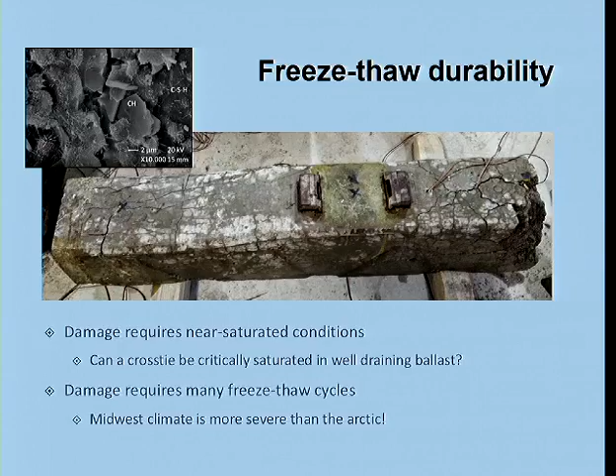We know that concrete is intended to be freeze-thaw durable, and we have a main tool to do that called air entrainment, where we intentionally infuse billions of small little tiny bubbles that reside in the microstructure. Here's a picture of typical air bubbles from air entrainment.

The concept is that we want the water that exists in the very, very fine capillary pores of the concrete material to have a bleed channel, a relief channel, moving toward this air void. So this channel, this boundary, is a boundary with an air void.

The bubble is huge, way beyond the size of the screen. So if there's water inside these capillary pores that wants to turn to ice, that pressure can be relieved if there's a path outward. By having these little air bubbles present in the microstructure, we essentially give that kind of pressure relief.

That's the basic idea. Of course, the people involved in manufacturing concrete ties know this, and they input air into the concrete. So presumably this would be taken care of, we would hope.

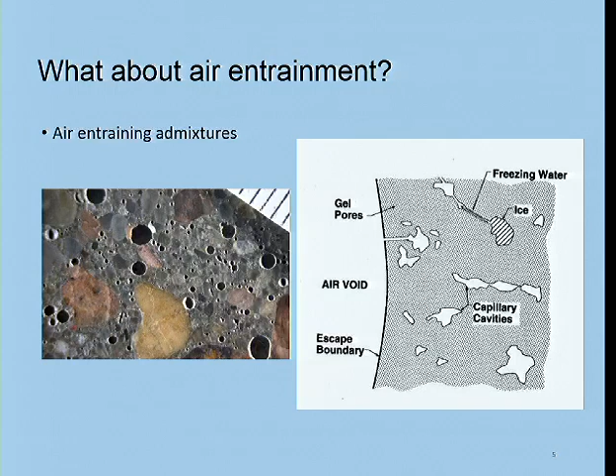But what drove this project in the first place is concern about field performance of concrete ties, and a broad experience through the industry that when we expose our products to ASTM C666 freeze-thaw testing, we do not pass it routinely. We continue to have challenges passing these thresholds for freeze-thaw performance. Why is this? So that was what motivated the project.

Here's a diagram, a picture of microstructure, to give you some background on how we measure these things. This particular picture shows how we use a flatbed scanner and dye the paste surface with a pink dye - the orange bubbles are illuminated - so we get a scan of microstructure that gives us three phases: the aggregate, the gray in between which is the paste, and the white which is the air bubble.

We did thousands of these images to characterize many, many different samples. I never knew concrete could be so pretty. Oh, it's beautiful.

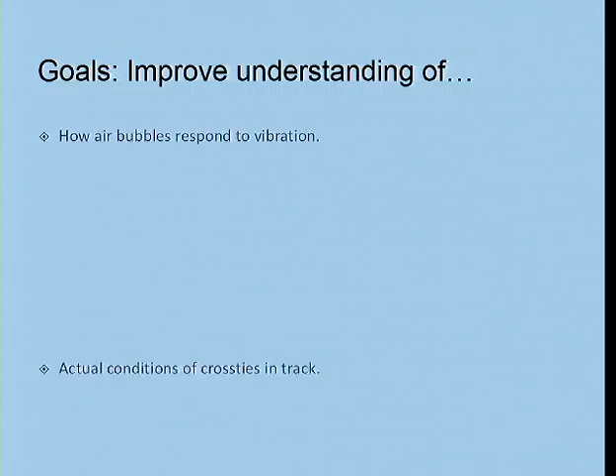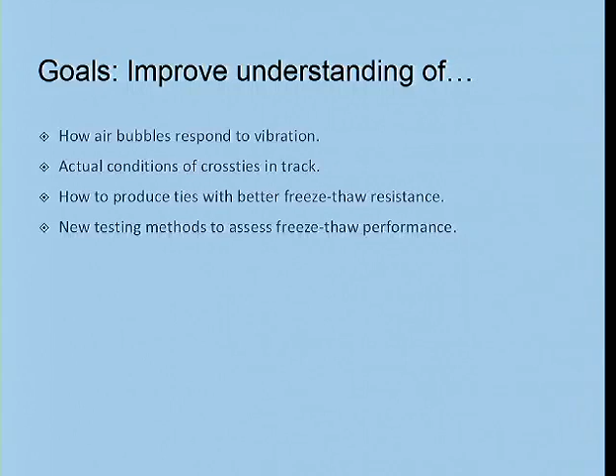Our goals in this project were to improve understanding of, first, how air bubbles respond to vibration during the manufacturing process; what are the actual conditions of cross ties in the track; how we should produce ties with better freeze-thaw resistance; and last, how new testing methods might assess freeze-thaw performance. These are the global driving forces behind the project.

We happen to have completed this project. We did our final presentation to the FRA in January, and I wanted to mention how this was organized, because it gives you a chance to quickly see how there was a significant contribution to theory, talking about bubble mechanics and vibration and so forth.

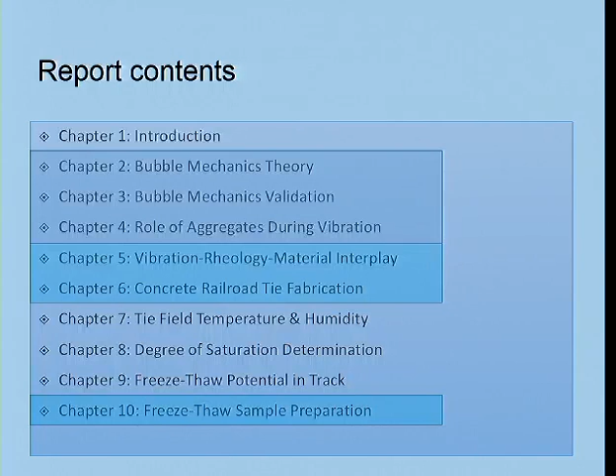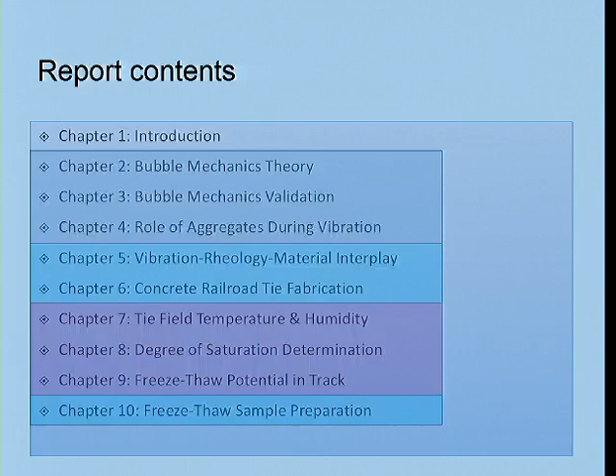Then there was a section on the interaction with the manufacturing process. We spent three trips going to manufacturing plants - the team did - and two of those trips were a month long, so they were getting lots and lots of data. And then the last is a big initiative having to do with measuring things in the field. So it's quite comprehensive in that regard.

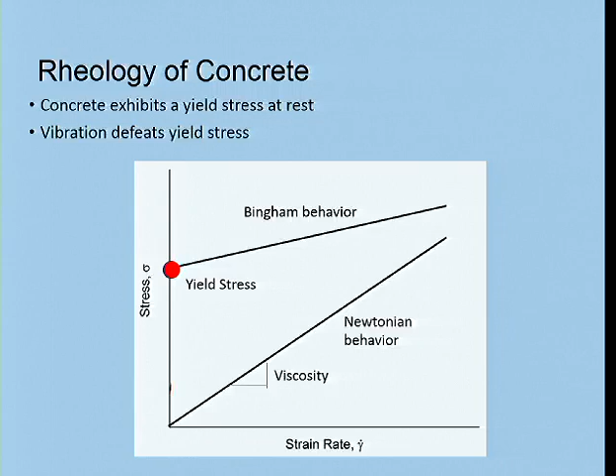However, that's not really where we're having our problem. These measurements are made at basically static conditions, very slow yield, we're not moving the fluid at all. When we are vibrating the material, the behavior is different. So we can do these rheological tests under vibration, and we get a different story. We get near where we expect to have yield stress, that yield stress is defeated, and we actually have what is essentially like a Newtonian fluid when we're under vibration.

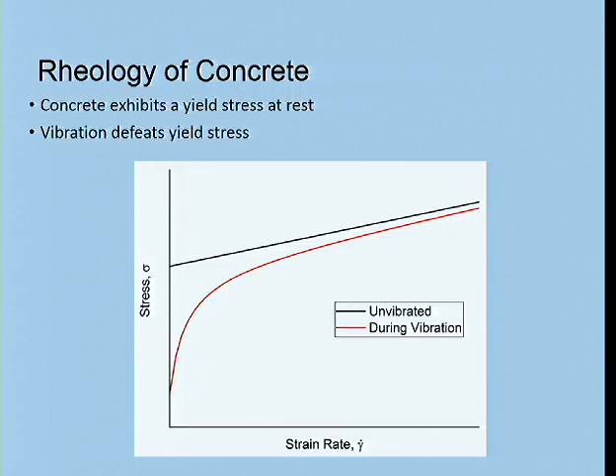Why is this important? Because vibration is how we consolidate the material, and it's the period of time we're concerned with today, when air bubbles are moving and rising through the material.

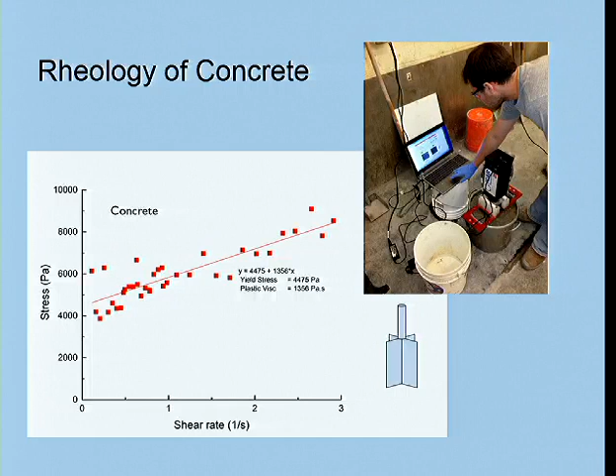Here's a picture of how we measure rheology of concrete, and this is some data showing this kind of Bingham behavior. We have little tools in the lab that allow us to measure rheological properties on bulk concrete samples. The theory for bubble rise goes something like this: if we have a hollow bubble, there's a buoyancy factor, counteracted by Stokes' drag force.

The equations from this analysis of buoyant force versus Stokes' drag force show that small bubbles, resisted by the viscosity of the fluid, are the slowest in their movement. So the velocity of the bubbles U is highest when the diameter of the bubbles is high.

So we get a picture here that under vibration, the first thing that's going to leave the system are the largest voids. They will tend to escape quite quickly. The very finest voids have some stability by nature of the viscosity of the system.

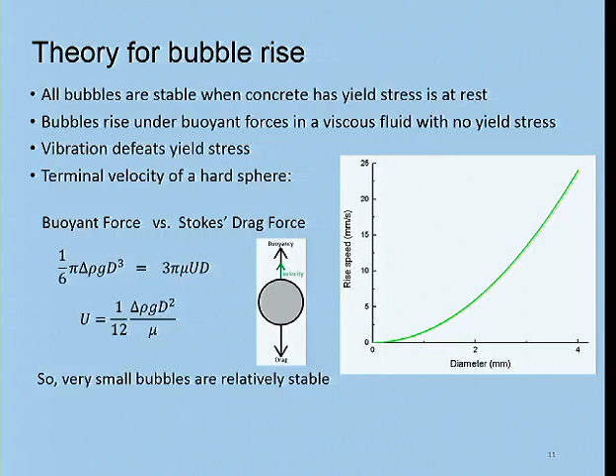We wanted to see how this worked, so we did experiments of concrete under vibration with air entrainment, putting an air meter with a concrete sample on a vibration table. We did these tests with concrete and could see air decreasing with time. Vibration time is on the x-axis, air content on the y, and you see this drop with time of vibration for concrete.

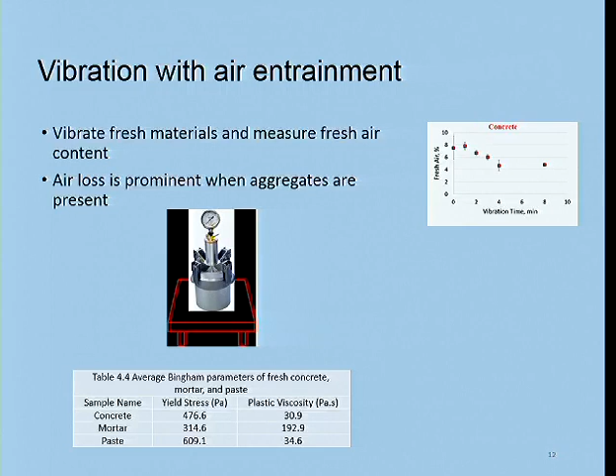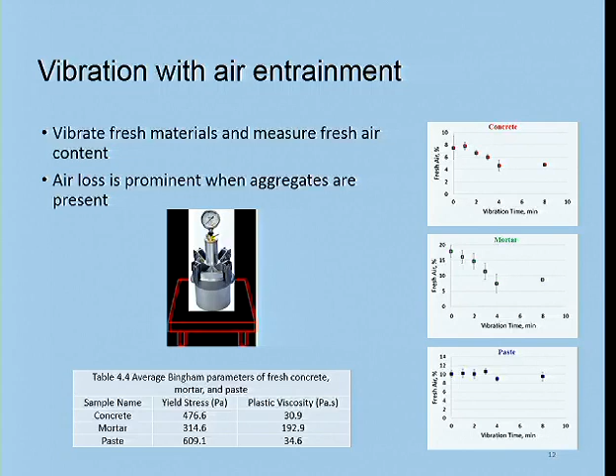If you did it with mortar, just the paste and the fine aggregate sand, we see the same kind of drop. But if you do a test on just paste alone, air-entrained, you see almost no loss of air when it's vibrated. That's interesting, isn't it? Something about the presence of aggregate in concrete and mortar, versus the lack of aggregate in paste, makes a big difference. That leads us to think about the granularity of these materials.

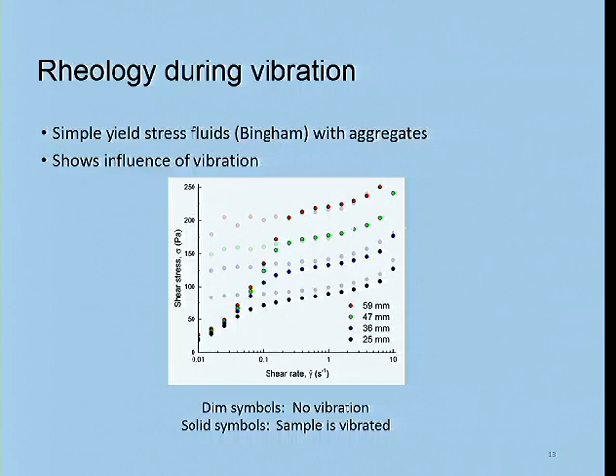So this is another picture where we did tests doing a sweep of viscosity or behavior with a rheometer, with different size aggregates. The light dim symbols are when we don't have vibration, and when we turn on vibration, our sweep shows this very different kind of drop in yield stress at the slow strain rates. So we know that the aggregates have a pretty important part to play in this problem.

It brings in some ideas about modeling the fluid as a granular fluid, and we have some tools available from literature. None of these things had ever really been applied to concrete materials before. These models, especially in the context of air, looking at air and vibration, we were bringing these kinds of things in for the first time.

So it was very interesting to see if this would help us explain the behaviors we were seeing. We used models like the Roscoe's equation, which gives us the ability to put in volumetric presence of sand and aggregate, and we can use the same model for coarse aggregate in concrete. It gives us the right kind of constitutive performance we were looking for, which encouraged us to explore how the granularity of concrete was a big part of the behavior we were observing.

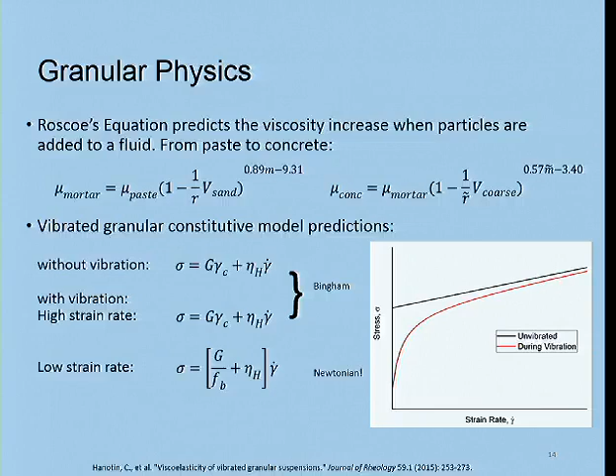The other thing you see is that not all these balls were treated the same. This vibration rod is moving back and forth, but the ones close were more dramatically affected. This led us to coin the phrase 'cone of action.'

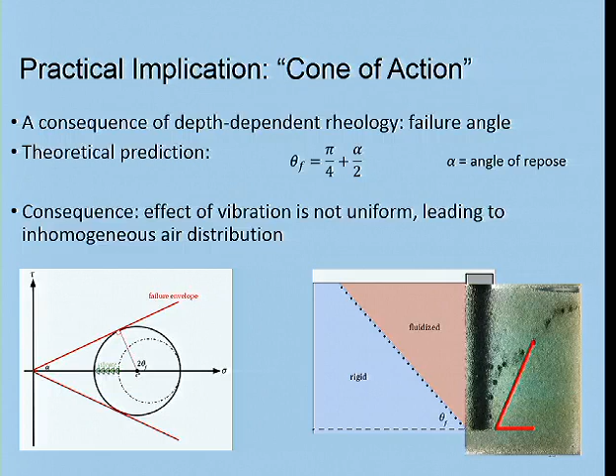If you're a concrete technology person, you'd recognize the term 'radius of action' - you put a vibration probe into concrete and see a radius of action that gets fluidized. We recognized pretty soon that this was a misnomer of sorts. We were seeing it as a radius of action only because we were looking at the surface. If we could look all the way down, we'd recognize it was not a radius or cylinder of action, but in fact more of a cone of action, and it changes significantly how we think about consolidation and the propagation of vibration through these systems.

This also led us to be able to model these systems, so now we can have models comparing no vibration versus 2 minutes of vibration. We start with a certain distribution of air bubbles, apply vibration, and get another distribution of air bubbles.

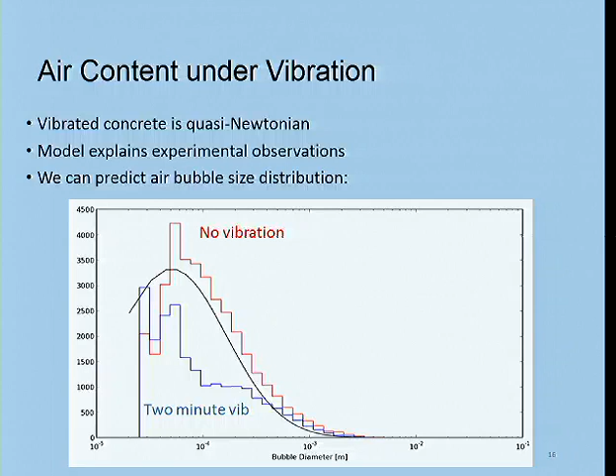With these kinds of tools, you could design the properties you need in the concrete and the intended distribution of air bubbles to give yourself freeze-thaw protection.

We were able to run simulations showing small air bubbles starting from large air bubbles. After 300 seconds, here's another picture of the microstructure, and after double that length of time, even more reduction of the size that you see here.

This chart tells us how viscosity plays a role here - when we have very low viscosity, the timing has to be very, very short. If you have very low viscosity in your materials, you run into air loss of 99% within a few seconds.

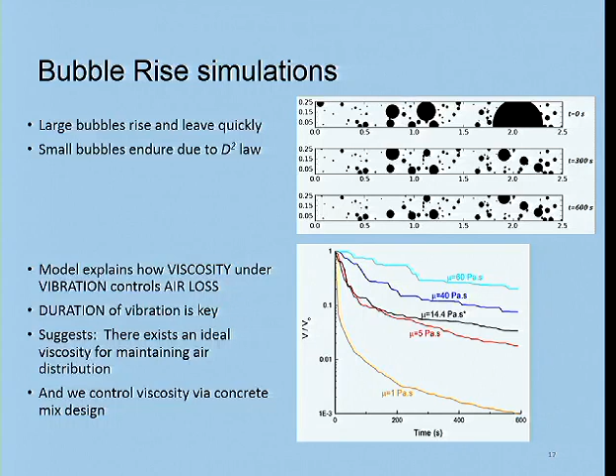So anyway, we got our hands around this whole technical problem about the physics of that problem. We did experiments on how vibration is damped by using accelerometers at different points along a beam that was vibrated at the end, so we could see that kind of behavior, which became part of our understanding of how vibration is propagated through concrete.

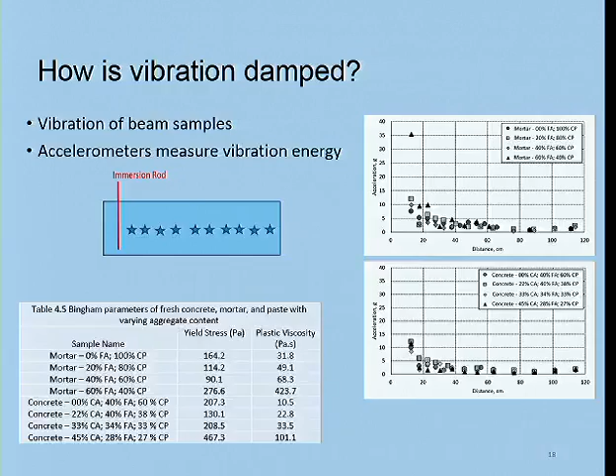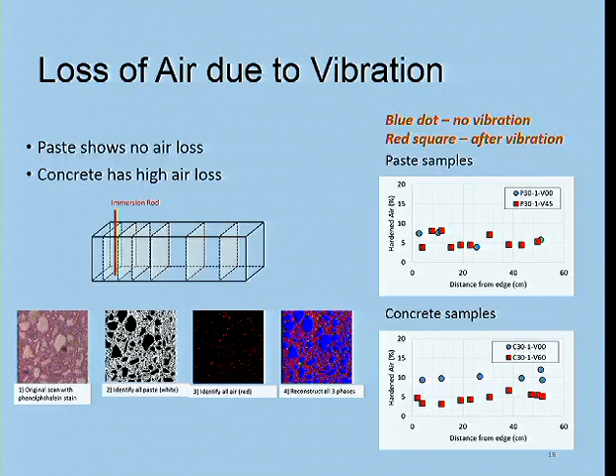Another thing we were able to do in those experiments is measure the air loss at different points using our image analysis technique. The point we want to make on this chart is that the paste samples that were vibrated have essentially the same air before and after vibration, but concrete before vibration is about 10% air, and after vibration about 5% air - so this same result is being expressed there.

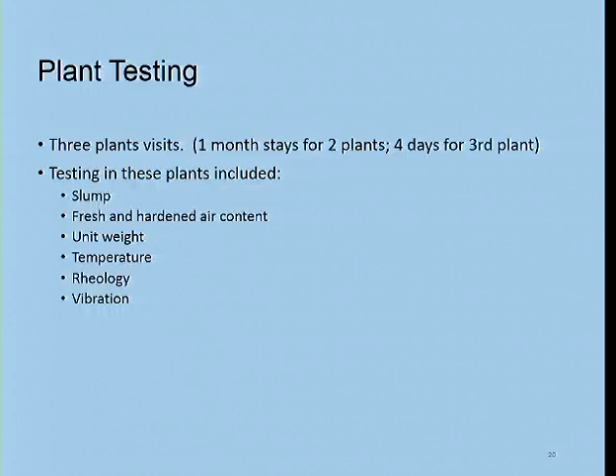We also had a chance to go to the plant. KSU students were involved in these plant visits - a 1 month stay for 2 plants and 4 days for a 3rd plant.

All these different kinds of properties were being measured. We had a chance to deal with plants using different types of vibrator systems on their equipment—rods on the casting machine, vibrators under forms. One plant used a handheld vibrator, and the results, of course, were different in these cases. That was part of our detailed analysis.

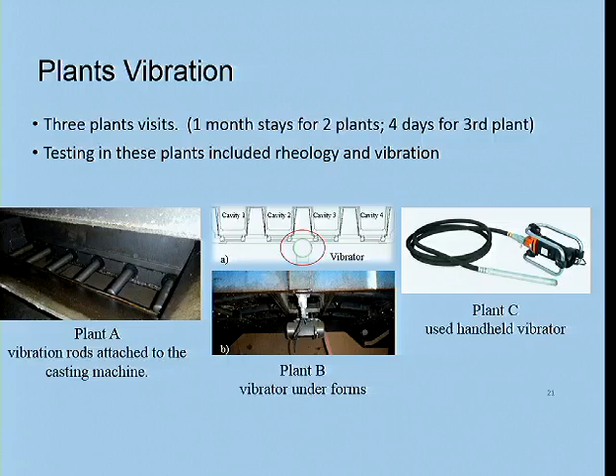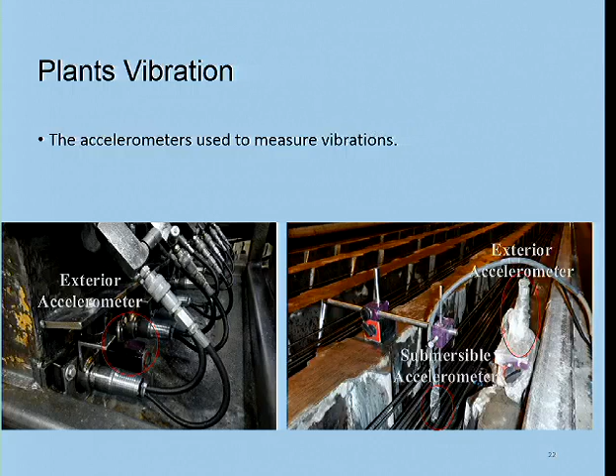You can see here a little more how we attach our accelerometer to the equipment, so we get a sense of the difference between the acceleration felt by the material versus by the forms themselves.

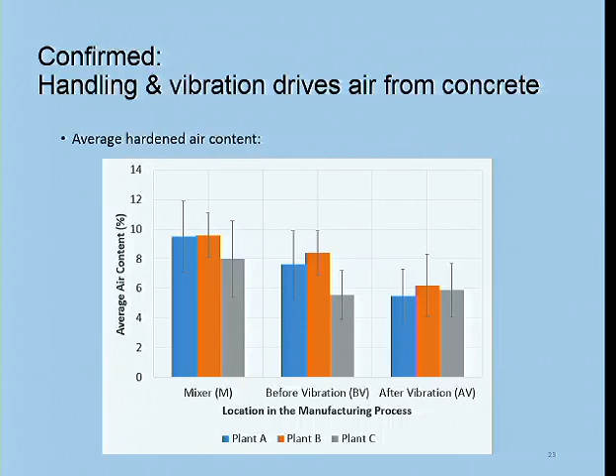One important finding here is that we confirmed that the handling and vibration of concrete drives air from the concrete in all these different plants. Plant A is blue, plant B is orange, plant C is gray, and in all cases, from left to right—at the mixer, before vibration, after vibration—you see this tendency to lose air at these different steps of the process.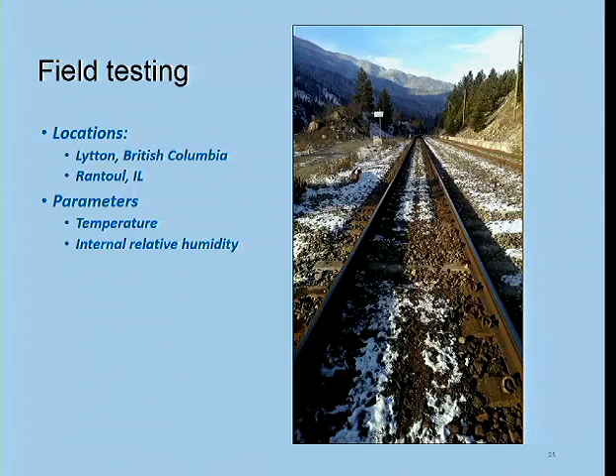The next idea we want to think about is the field conditions of concrete. We had a chance to run a field testing program at Lytton, British Columbia, as well as here in Rantoul, measuring the temperature and internal relative humidity inside the concrete ties. We used little sensors that measure temperature and relative humidity.

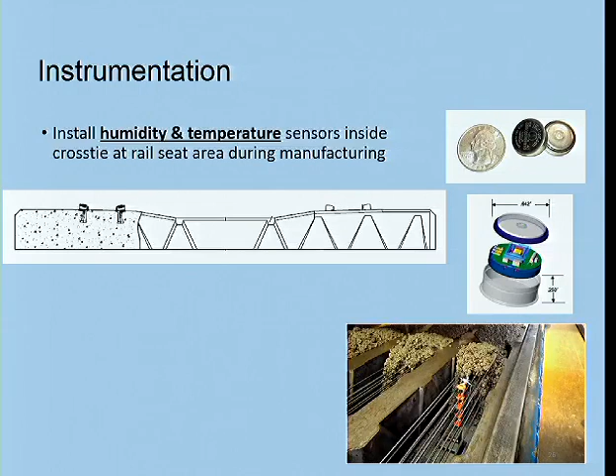We cast these inside concrete ties and shipped them out to the field. You can see here the kind of arrays that were established so we could get depth-wise sensitivity to the change of properties, and we installed these in track, and then at Rantoul in ballast held in boxes—as much of a replication as possible of field conditions.

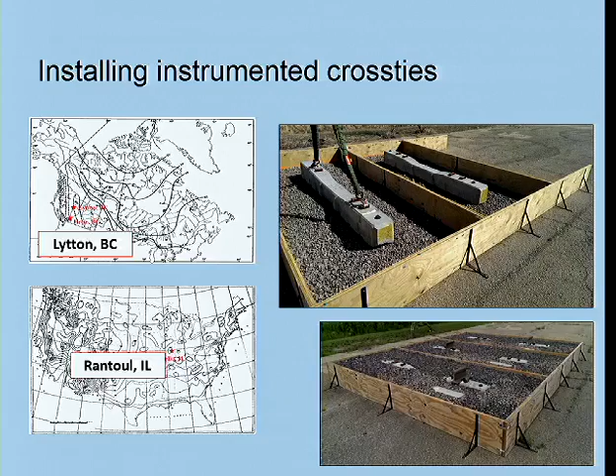All this data helped us build models about the temperature you measure inside ties, the moisture you expect inside ties, and how it compares to ambient conditions. We'll always be able to get weather station data—so how can that data be used as a predictor of what goes on inside a tie during different moisture events, precipitation, temperature, and so forth?

So we have all these temperature histories and moisture histories, and it leads us to this function—this is the experimental record of when we were getting freezing events under saturated conditions inside ties. The top line here shows the freezing events under ambient conditions, just the temperature data—how often did we go through a freezing event?

These next lines show how often different points of the tie, at different depths, actually felt this freezing event. This one's closest to the skin, and these are most interior to the concrete tie. This gives us the basic finding that concrete is persistently high in moisture during the winter times.

Concrete temperatures do experience significant cycling, and we see a relationship between the weather station data and what the tie actually feels of about 0.7. So 70% of the time that your weather station data says you've undergone a freeze-thaw cycle, the tie material itself feels it. Otherwise, there's sort of a damping of that effect.

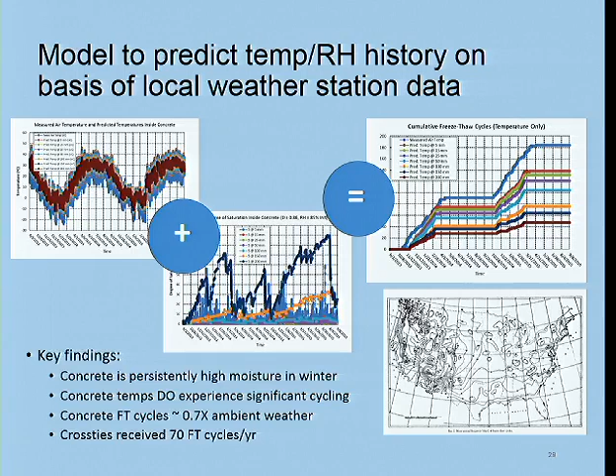This tells us that we receive maybe, just to guess, about 70 freeze-thaw cycles a year. You might recall that the C666 test requires 300 cycles for its torture test, so within a few years you've actually achieved those numbers of cycles—so you might feel that that is, in fact, an appropriate kind of testing to assess this material.

Another part of this was how we should sample concrete ties. Right now, they are required to take samples out of the concrete tie itself by saw cutting in many cases. It's a pre-stressed element, and there's concern that you have these strands inside, and cutting through the strands means you're alleviating stress in material that's under stress.

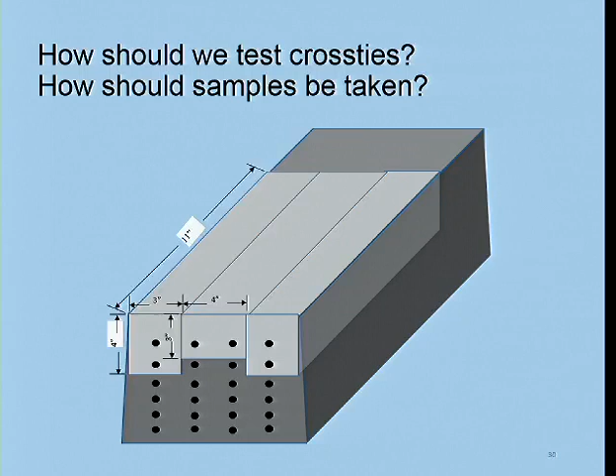What does this all mean in terms of measuring freeze-thaw performance? There was an extensive freeze-thaw testing program in this project. We tested full-length ties inside a specially manufactured freeze-thaw chamber at Kansas State, and we could see that we achieved the kind of distress we would expect with freeze-thaw damage.

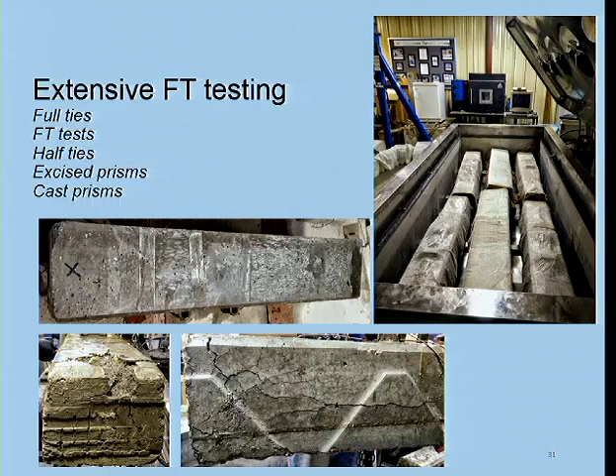We tested lots of different configurations—full ties, half ties, prisms cut from the samples or ties, and also prisms cast with no steel in them.

One of the most important findings is proving that anything cut from a precast member that involves cutting through the steel is problematic. We routinely saw worse performance in these saw-cut samples than in the related half-tie samples—some problems there too, but much quicker decay of freeze-thaw performance in the saw-cut samples.

The first thing is that we developed new models for vibration and air. These fundamental physical models, fluid mechanics models, are some of the first time we've had that level of detail applied to concrete materials. I think of that as a very important advance.

Number two, we documented true field conditions of concrete cross ties. This was something people just speculated about before our project. Now we have real data about that.

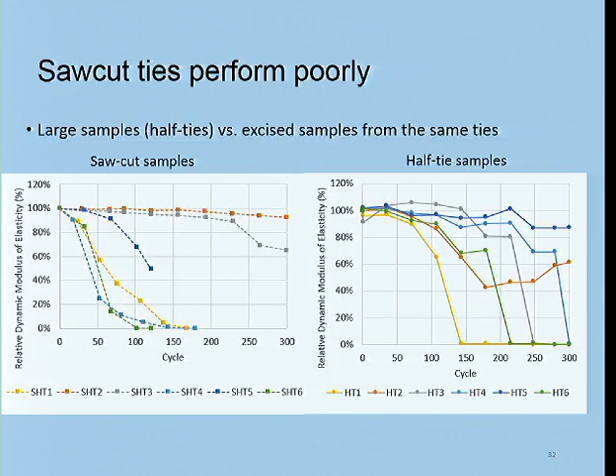Going back to your result that showed different vibrational performance depending on whether aggregate is present, is there a dependency on vibrational frequency there? We did some testing on vibration frequency, and in the boundary conditions, of course there is. If you move your frequencies to very long periods, you're changing things dramatically. But within the normal ranges you'd expect to see in industry, we did not see a great amount of sensitivity.

I think these lessons we're learning are broad and general for industry, and there's boundaries to it—if you keep looking farther out in this spectrum, you will see an impact. But we weren't drawn to think of that as a major thing. One of our recommendations is not a specific frequency that this is the magic one. No, we don't have that.

Thank you. My question is related, since you see different behavior in air entrainment with aggregates, what recommendations are given regarding aggregate choice in concrete? Well, a lot of our comments about aggregate choice have to do with making very sure you really do know what that is. This is somewhat standard for concrete technology, to have done sufficient and adequate freeze-thaw testing of your aggregate, so these problems, like cracking problems, are not brought in. We don't want that to be a concern for us.